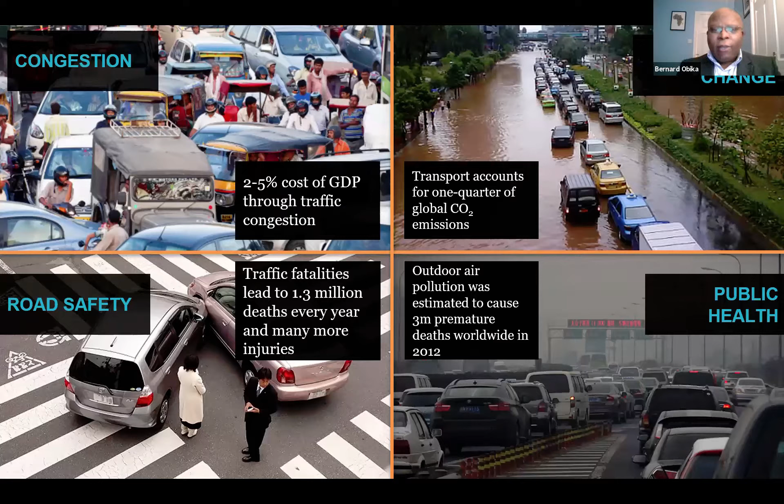And of course, the pollution we see is causing so much havoc to communities around the world. And so that is really what the HVT program is about.

How does that fit in the context of global development, sustainable development goals? I read from a statement in the SDGs that says sustainable transport systems, along with universal access to affordable, reliable, sustainable and modern energy services, quality and resilient infrastructure, and policies that increase productive capacities will build strong economic foundations for all countries. So transport is certainly a key part of the SDGs and cuts across a number of other SDG targets.

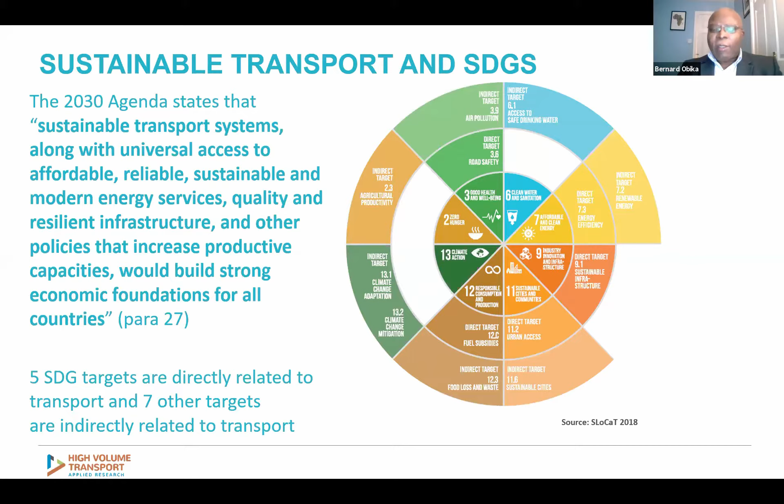So how does the high volume transport program work? The program is divided into 2 parts. In part 1, we subdivided our effort into 4 major themes. The first theme being long distance strategic road and rail transport.

Urban transport has been the second theme. Low carbon transport, the third theme. And the fourth theme included such issues as gender, vulnerable groups, and inclusion. Within that last group, we also included road safety.

So we engaged with a number of fairly major research organizations to carry out a state of knowledge review, to understand where we are, what are the real current issues affecting us, and what are the barriers in low-income countries. This resulted in a fairly extensive, what I still think is probably arguably the most comprehensive treatise, up-to-date treatise on what we know about transport in low-income countries.

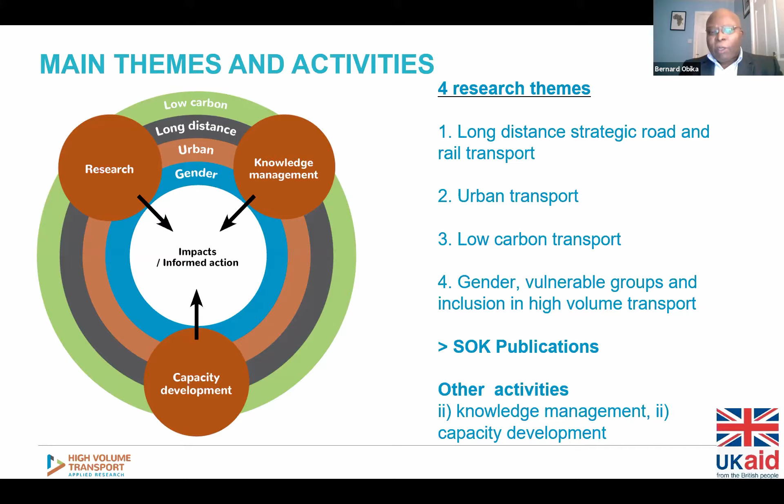These were published in the Sustainability Journal, and there is a book based on those publications that will shortly be published. In parallel with carrying out those state of knowledge reviews, we also undertook extensive knowledge management and capacity building work.

So as we move into part 2 of the high volume transport program, the SOK studies allowed us to identify the priority areas to focus our research efforts in. We narrowed this into 6 key priorities.

That is policy and regulation, including engineering. For example, the topic CRISPS falls under this particular category, the topic we're about to talk about. Climate change mitigation and adaptation is a key focus for us. Inclusion, gender and road safety remain a priority area.

Technology and innovation, including, for example, decision support systems such as HDM4, which many of you will be familiar with, remained a priority for us. And of course, we have to address fragile and conflict affected states, and underpinning all of these issues is the issue of research uptake and capacity building, without which we will not see the impact of much of the work that we do.

So, one minute, Bernard. Thank you.

As we go through, just to highlight some of the activities that HVT is undertaking at the moment: we have 13 major research projects ongoing in various aspects of the priority areas I've mentioned. We have also responded to the COVID-19 pandemic with up to 21 response and recovery initiatives. And of course, we continue to work on various aspects of seeing the impact of what we do on the ground.

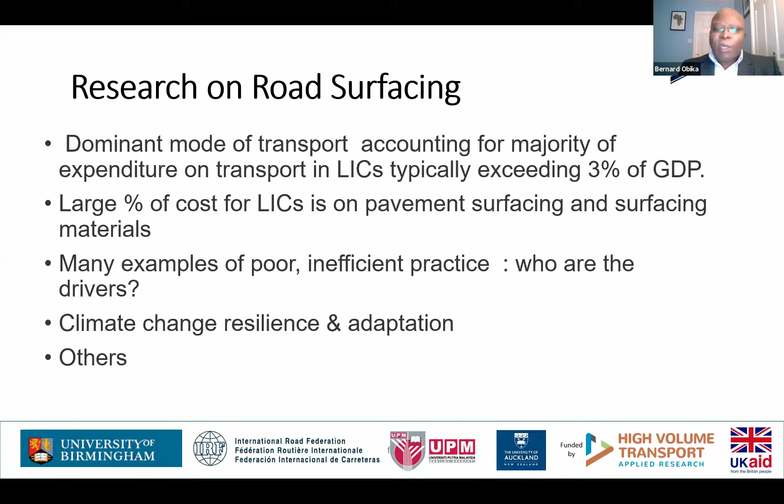So we support policymakers, central governments, the private sector, practitioners, and civil society in making impact and changing transport systems. That is what HVT is there for.

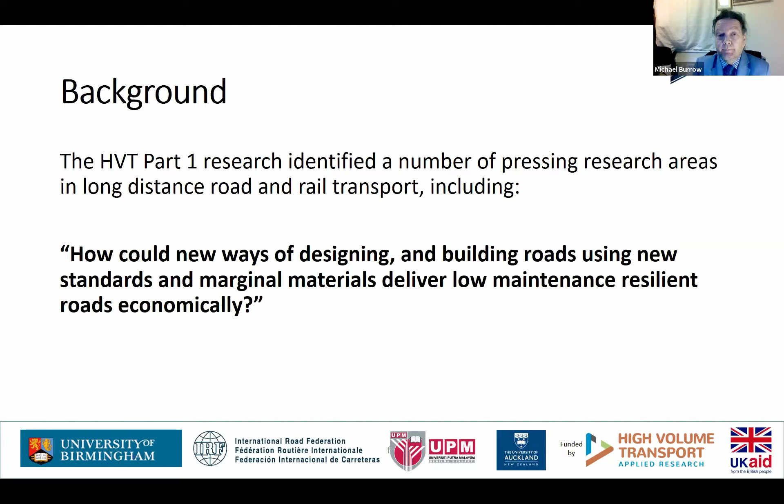Before I go on and give an overview of the project, let me introduce you to the project partners. We have ourselves at the University of Birmingham, and at Birmingham we have 3 institutions and schools involved in the research: ourselves, Dr. Gatura and myself at the School of Civil Engineering, the International Development Department, and the Department of Physics and Astronomy.

Project partner from Auckland, New Zealand, Dr. Theuns Henning, will introduce himself in a moment. He leads the research in the Transportation Research Centre at the University of Auckland. And in Malaysia, we have Professor Ratnasamy Muniandy, who leads the Highway and Transportation Engineering Research Centre at UPM.

And then, of course, as you've been introduced to, we have Mrs. Susanna Zammataro, who's the DG, the Director General of the International Road Federation.

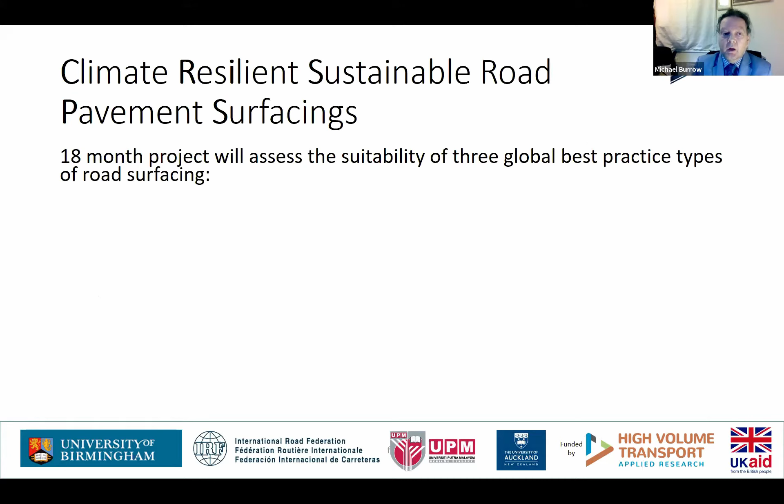So a very brief overview about the CRISPS project. It's an 18-month project, and we're assessing the suitability during the project of 3 global best practice types of road surfacing. These road surfacing types are the result of many years of research in New Zealand and Malaysia. Dr. Henning and Professor Ratna will describe those to you shortly.

These pavement surfacings have been utilized and developed in Malaysia and in Auckland, and the goal of this program is to assess their suitability within this project in the low-income country context. Primarily, we're looking at two things: the resilience of the roads to climate change, and their ability to save road user costs over the life cycle.

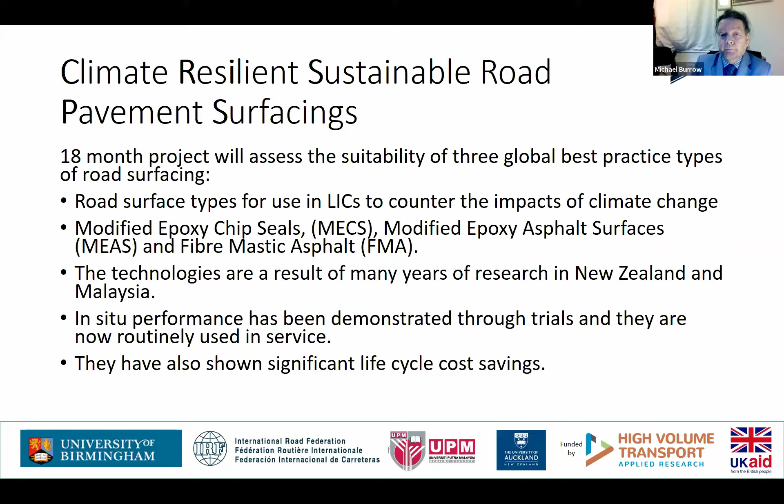What's the research methodology? Just a little detail: we have 4 work packages. The first is underway, undertaken in New Zealand and Malaysia, collecting data on the existing performance of roads using those 3 surfacing materials. The idea then is to extrapolate the performance of those roads to the conditions we might consider in low-income countries, so there's a lot of mathematical modeling that will take place there.

The second work package is the life cycle analysis module, where we consider the deterioration models developed in work package 1 and analyze those from an economic point of view over the life cycle and in the conditions we expect to see in low-income countries—conditions in terms of traffic, maintenance, and environmental issues.

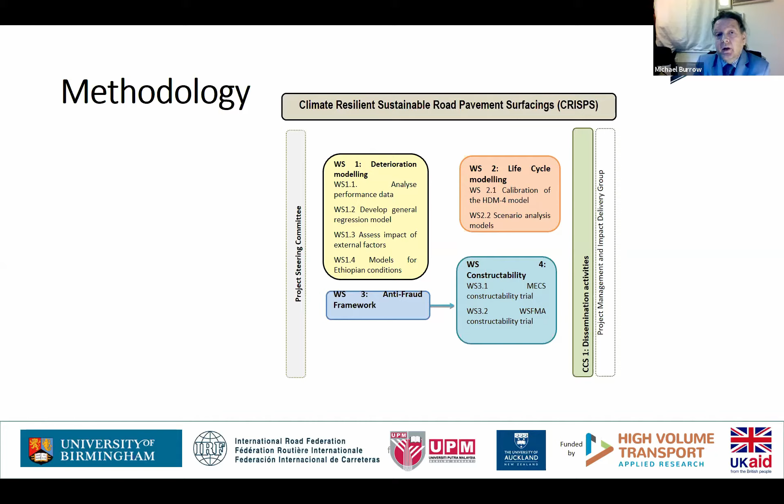A very important aspect of our program is that we have a project steering committee, an independent committee overseeing the research, led by Dr. David Alabaster from NZTA, the New Zealand Transport Agency. We also have a very important component, which you'll hear about last today: the dissemination strategy, because without good research, if we don't disseminate it, then it remains simply research.

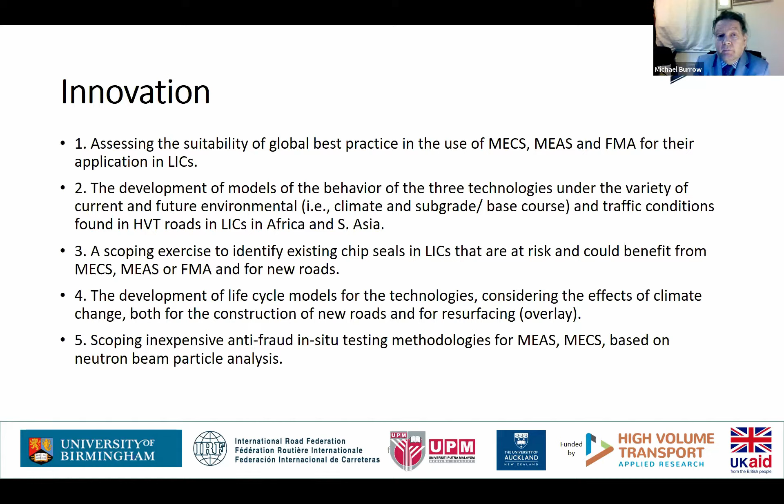There are some key points about the innovation we'll be undertaking within the project. What hasn't been done before worldwide? Well, we haven't assessed the suitability of best practice in the use of these three pavement surfacing materials, particularly for their application in low-income countries.

We'll be developing novel models of the behavior of the three technologies under a variety of conditions, both currently occurring in low-income countries, but also those we expect in the future as a result of climate change, and changes in government policy, funding, and so on.

Work like this is crucial in terms of determining the development of life cycle models for the technologies. And again, that's something that hasn't been undertaken before.

If you can imagine the data we collect from specific areas in New Zealand and Malaysia, how can we extrapolate that to the economic, environmental, and socio-political conditions we'll find in developing countries? One or two of those conditions might be similar, but there'll be a whole range which are not similar. So part of the crux of the project is modeling and understanding how the material behaves under those conditions now and into the future.

And then, as I mentioned, we'll also be developing an anti-fraud mechanism through work with nuclear physics, to see how we can specify a cheap, low-cost solution for doing something similar in the field.

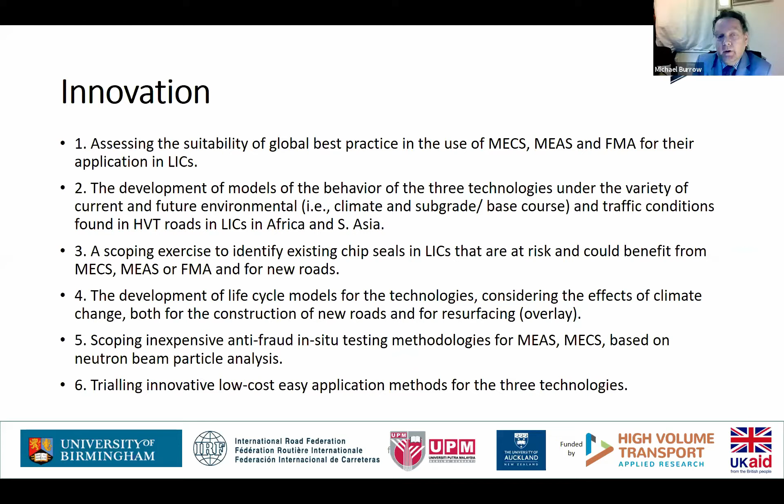There'll be a series of field trials, which Dr. Gatura will explain shortly. Thank you.

Thank you very much. I want to acknowledge my colleagues here from New Zealand. It's already been mentioned that David Alabaster from our New Zealand Transport Agency has led much of the work I'll be talking about in the development of the epoxy asphalt technology and epoxy chip seals in New Zealand. Also my colleague from the University of Auckland, Associate Professor Joseph Costello, who was one of the students from Birmingham, and in a roundabout way was the catalyst for the relationship between us and Birmingham. The University of Auckland is central to the city of Auckland itself.

For those who don't know where Auckland, New Zealand is, it's about eight movies' flight distance from the UK, depending on the route you take. We've got about 30,000 students. The Faculty of Engineering is the largest faculty in the university, and the Civil and Environmental department is the largest within our faculty. We draw about 200 to 230 students into our Year 2 program. We're very proud that this year we were announced as number 39 in the world rankings of civil engineering departments.

So the research questions - the first one, as Michael has mentioned, has been addressed in the first stage of this project: understanding the life cycle impacts of climate change on the roads. What we need to look at now is to understand the expected performance of our alternative technology, the epoxy chip seals. Then, once we know that, we need a life cycle analysis approach to prove when these alternative materials will be a better life cycle option for our roads.

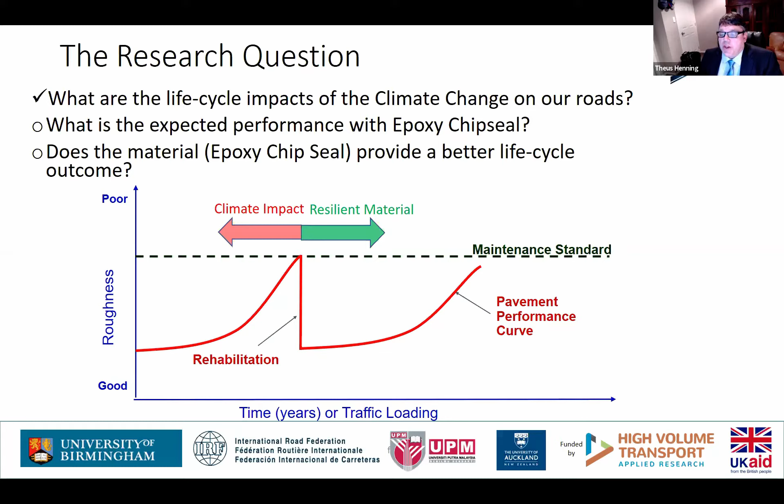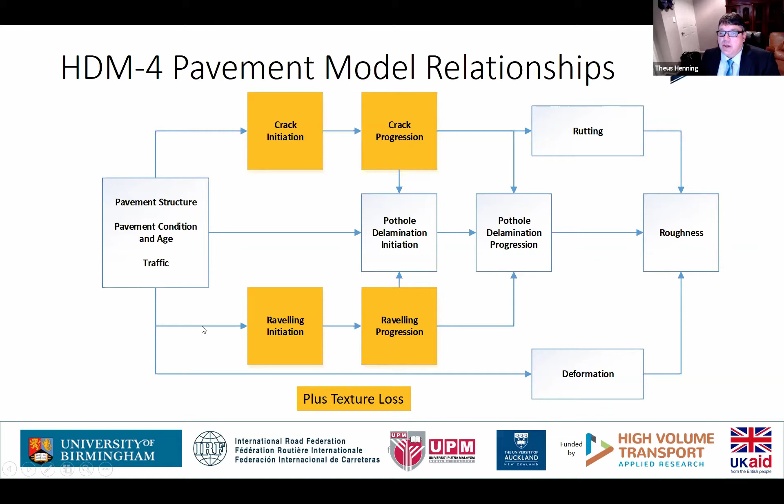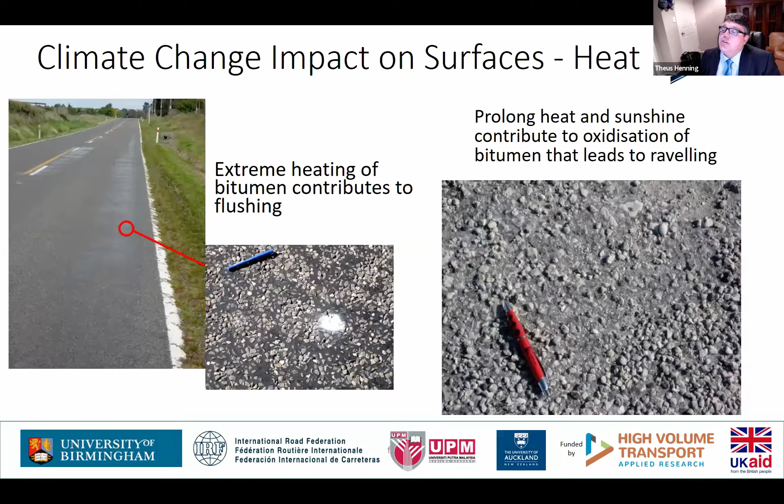When we look at the different impacts from climate change on our road surfaces: if there's a good amount of bitumen on your road, it should last long, but unfortunately during extreme heat conditions you can expect some flushing to happen, where the bitumen rises to the top of the surface and you lose friction. The alternative is if you don't have much bitumen within your surface, and through prolonged heat and sunshine you start losing the stickiness of the bitumen through oxidization, and you start losing the chips as raveling occurs.

On the other side of climate change impacts, when things get a little wet, the predominant defect we see is pavements getting weaker. Increased moisture conditions lead to a reduced pavement bearing capacity, and as a result we start seeing cracks occur on the surface. Once cracking is there, more moisture gets into our pavements, which then accelerates the deterioration of our pavements.

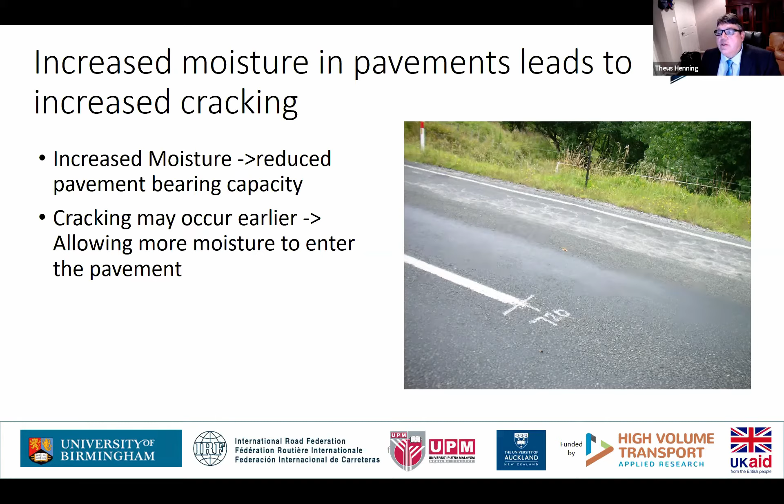So what we've shown here is a typical crack progression deterioration on our road surface. There are two stages we're interested in: the first is cracking initiation, which predicts mathematically when exactly cracks are going to start appearing, and after that the crack grows at a certain rate. Through a calibration process, we look at the prevailing conditions, how the pavement is built and the traffic it carries, and for that specific condition we calibrate the model so it reflects reality on that specific road link.

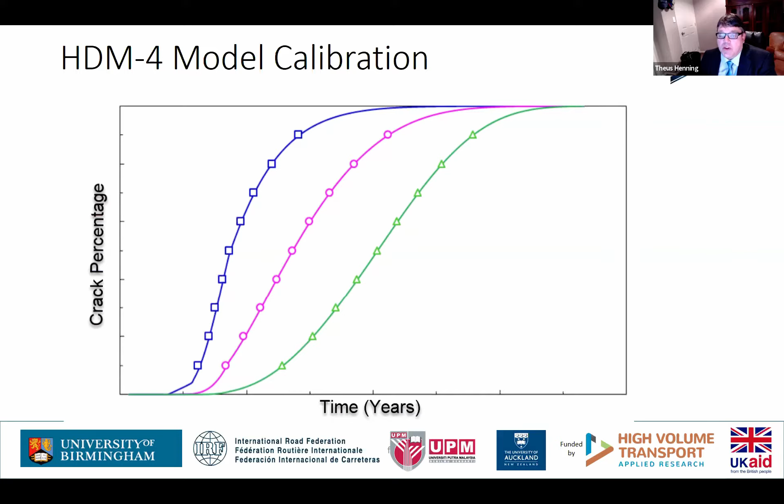We don't have that much data to work with because the technology we're talking about, both porous epoxy asphalts and epoxy chip seals, are relatively new. So a lot of our data and assumptions come from laboratory testing undertaken in both Malaysia and New Zealand. We do have a few trial sites out that will certainly inform us with more data.

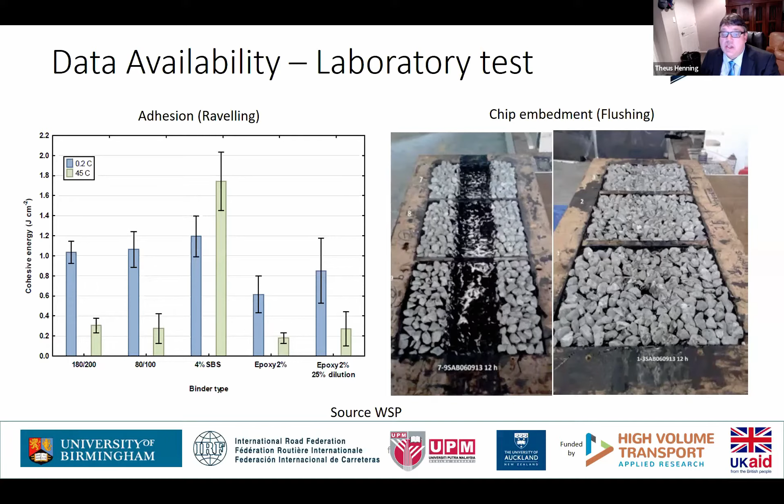On the left, I've got some laboratory results on the adhesion properties of various different surfacing and bitumen types, and we can see that we get quite an advanced cohesive energy out of our epoxy mixes. On the right-hand side, we look at chip embedment or flushing that occurs under heat conditions, and again with the epoxy surface you get a very stable, stiff surface that does not have the wheel track rutting you see on the left-hand side.

We've also done some early investigation at a network level using a system largely based on the HDM4 approach, which is what we use here in New Zealand. We've taken a sample of the network and looked at the failure probability of chip seals - that's the blue line - and also of chip seals under high stress conditions. On the vertical axis is the survival rate, the probability of failure against the life you're going to get out of it. Typically, if you look at the 50th percentile, you know roughly how long those surfaces can last.

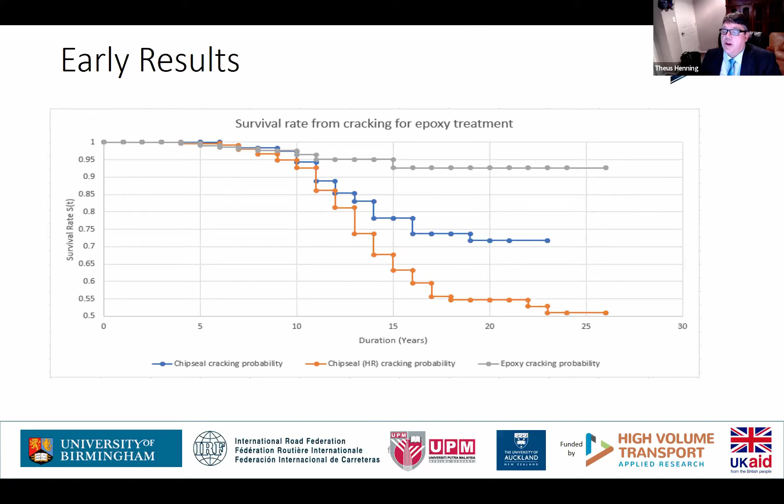What you can see out of our epoxy surface is that the cracking probability is quite a bit lower compared to some of the other surfaces, so we do expect quite an extended life out of our epoxy surfaces. So that's what I have for this moment. Certainly for the study area, we want to provide all-weather resistant surfaces for all our road users, whatever that may be. Thank you very much.

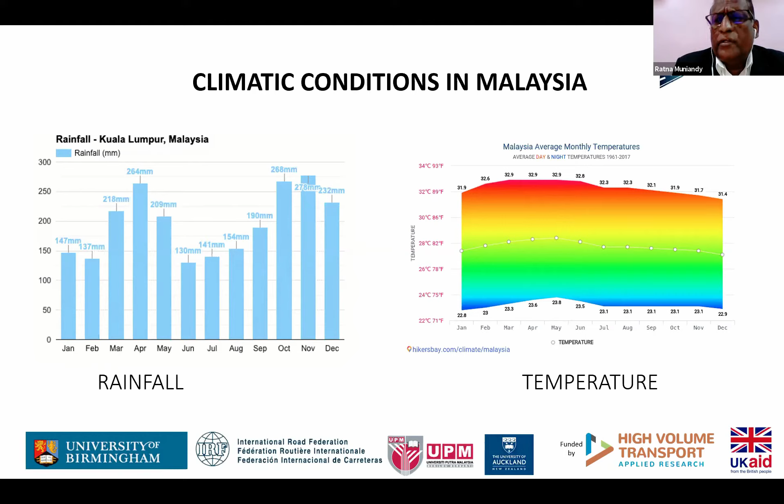Just to remind you, this is just an average value. There are situations where the temperature has gone up to 36 and 37 before, but we're looking at very rational figures here. So again, this puts Malaysia in a very, very bad, highly climatic problem situation.

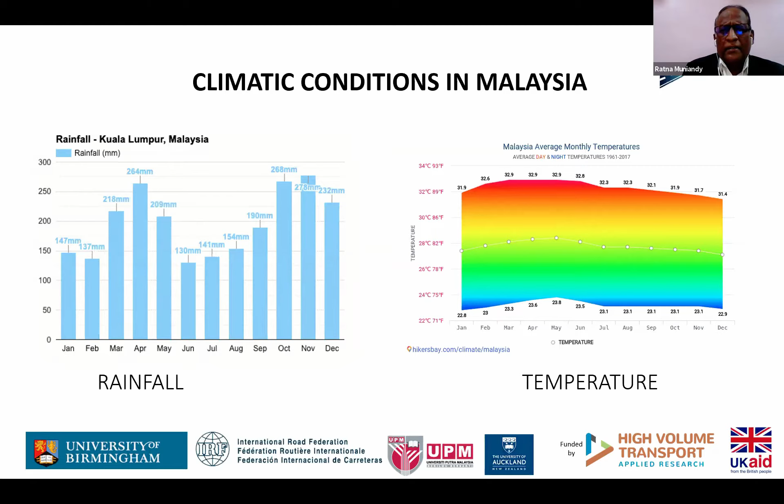Another background on traffic conditions in Malaysia: we have almost 31.2 million registered vehicles as of 2019, made up of passenger cars and commercial vehicles as always. The total road network, federal and state roads, amounts to almost 250,000 kilometers.

And the expressways, we have about 2,000 kilometers. But it is pretty much a challenge for the authorities and researchers to keep up with such a huge network for a small country like Malaysia, right?

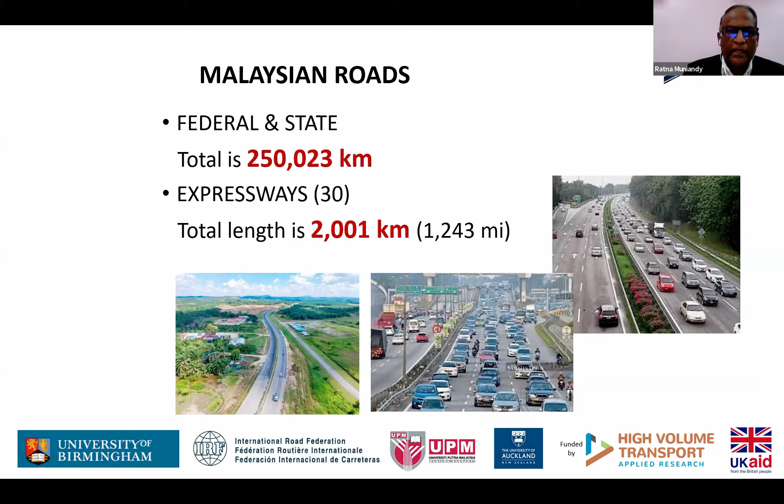Talking about moisture, with the torrential rain in Malaysia, we have problems like water table fluctuations that encroach into lower layers of the pavement, even into the asphalt layers. That is actually a problem, not forgetting the moisture infiltration from rainfall through cracks in the pavement.

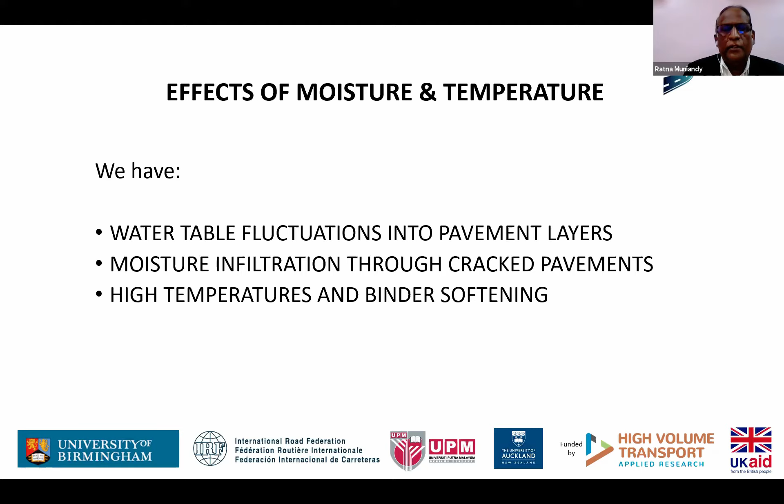And again, I mentioned the temperature. We do have high temperatures, and that may soften the binder. So overall, the climatic situation is posing a major problem for asphalt pavements in general.

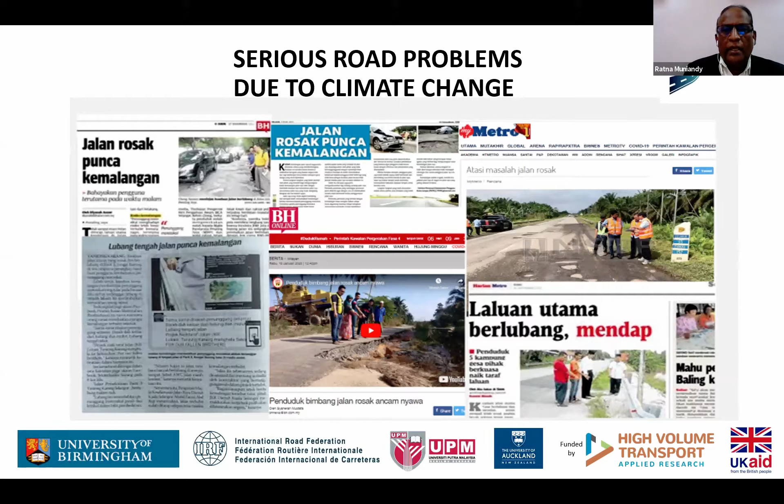These are some of the issues splashed across the media in Malaysia. I'm sorry, this is in our own Malay language. So it all amounts to problems: potholes, rutting, cracking, raveling, that the other speakers have been talking about.

Malaysia is no exception, but I'm quite happy that Malaysia has come a long way in improving all the roads that we have. This was taken some time back, so I think this problem is pretty much reduced. I'm not saying it is solved, but it is reduced.

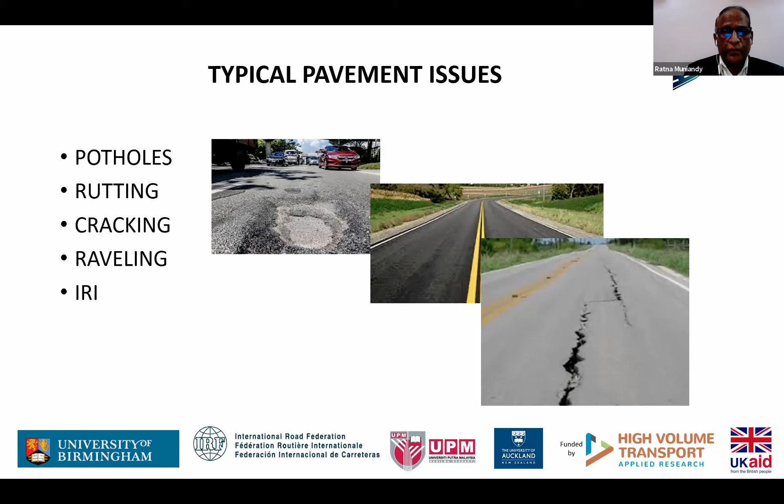Now, what about this Fibre Mastic Asphalt? We have tried so many different materials as modifiers in asphalt binders, but this is a novel process to use cellulose oil palm fibers from the empty fruit bunch. Once the fruit is taken out, we have the empty fruit bunch that goes through steam explosion and is finally processed into cellulose fiber of certain sizes.

Not all fibers will work. You may ask me whether fibers from the tree trunk and the leaves work. They won't, and we have already tested that. So it is specifically from the empty fruit bunch.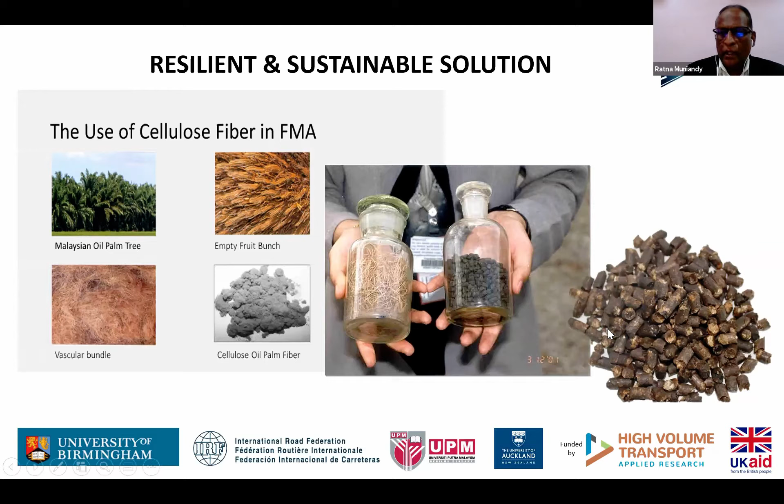Again, like I said, it comes down to all the processing, the size, and so on, to be converted into pellet form. You can see the pellets for easy introduction into the pug mill during the mixing. Now, how it works actually, right?

Based on all the work done in Malaysia, and the trial lays and projects undertaken there on fiber mastic asphalt, we find that the binder is retained for over a long period of time. This is the key factor in the use of this biomass waste in asphalt mixes.

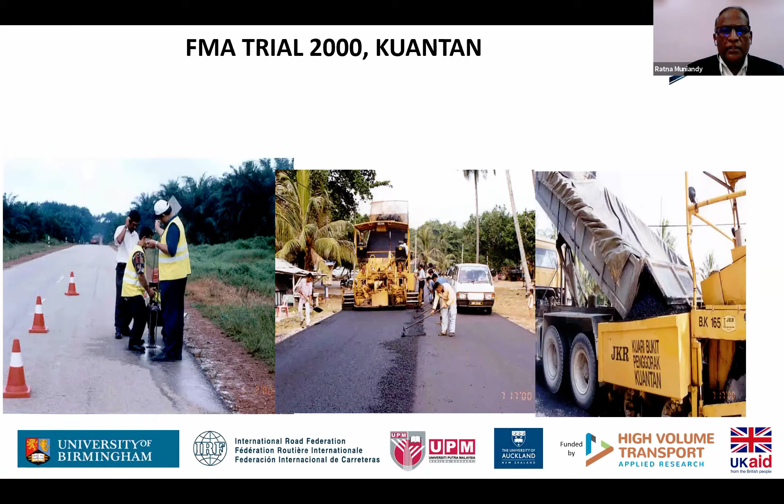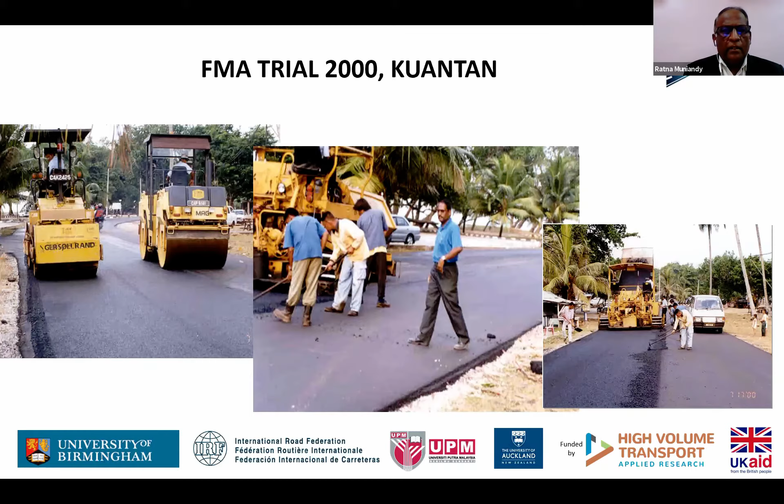These are some promotional videos dealing with fiber mastic asphalt in Malaysia, showing some of the work done since the first trial in 2000, which was done with the help of the Public Works Department somewhere on the east coast of Peninsula Malaysia. Since then we still have a lot of data from these segments. Some work was also done in Putrajaya around 2000, and these are more recent works.

In 2018, they had a trial on the Senai Desaru Expressway. This stretch was quite bad, and after trying various technologies, finally the fiber mastic asphalt was used on that stretch for some length, and it is still performing very well.

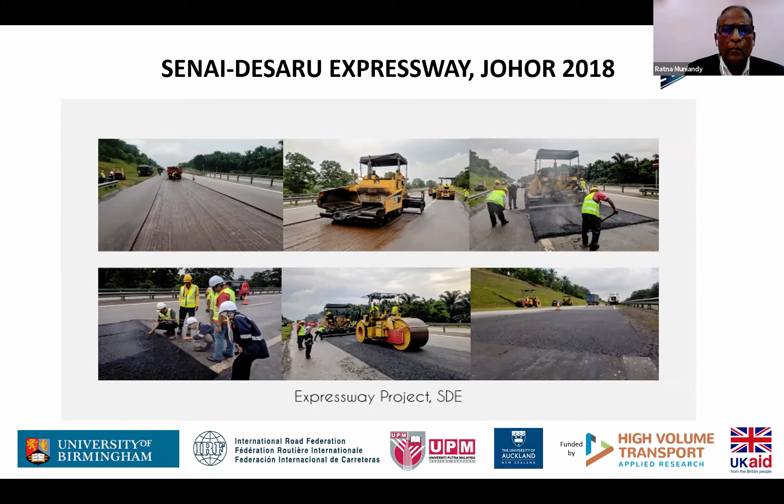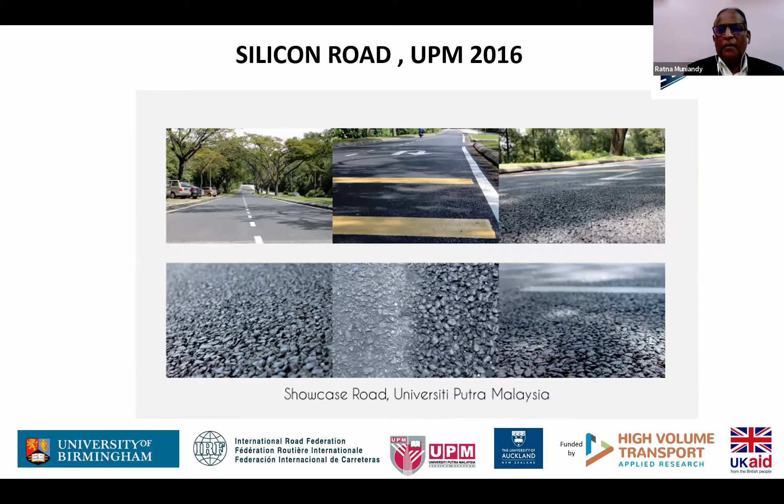These are some other road stretches carried out back in 2016, so it's already almost 4 or 5 years now. If we look into the micro texture of the pavement itself, we find that the binder is still retained. That is the magic thing about this fiber, retaining the binder for a long period of time.

This is another 2 projects carried out in Malacca. This is not a heavily loaded road, but a medium traffic road for the community there. 2 projects done in 2016 and still doing very well, and again I'd like to highlight that binder retention is excellent.

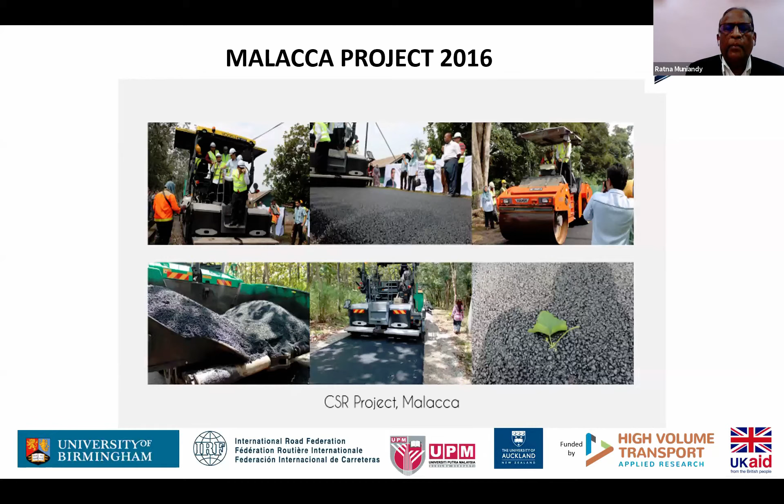Now with all of this, we would like to carry out a life cycle analysis on the data available to us, and of course we will continue to acquire more data. Basically, we will look into the traffic progression since the FMA was introduced on certain segments, then look into the performance data of FMA, and at the same time we do have falling weight deflectometer data on pavements with the technology, which should give us the status of the lower layers.

In terms of the structural number, the E values, and so on, with all of this data we should be able to run initial and remaining life assessment of fiber mastic asphalt based on some transfer functions. If HDM is available, we'll use the HDM4 model. Otherwise, we will develop our own regression model, which shouldn't be a problem.

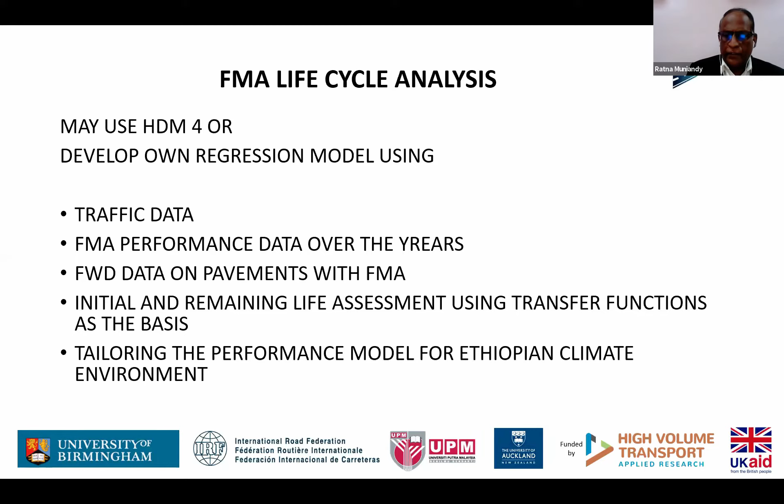The next challenge will be to tailor the fiber mastic asphalt used in Malaysia to Ethiopia, with its different climatic conditions. After looking at the Ethiopian climatic situation, in the Kola and Berha regions around the central part, the temperature profile is quite similar to Malaysia, so I don't see much difference there, except that the rainfall range is much lower compared to Malaysia.

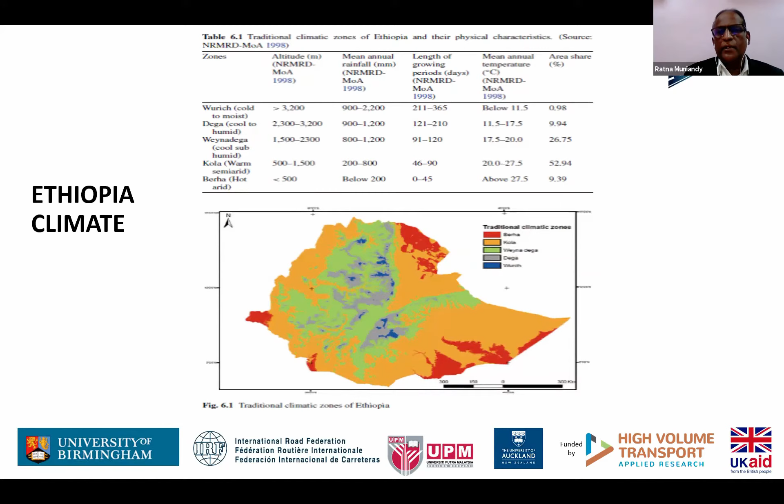So I'm not sure, I haven't looked at the data from there yet, so it's very difficult to say how much moisture damage has taken place there. But as far as temperature is concerned, yes, it is quite similar to Malaysia. Okay, these are some of the trials still ongoing with the airport and more expressways.

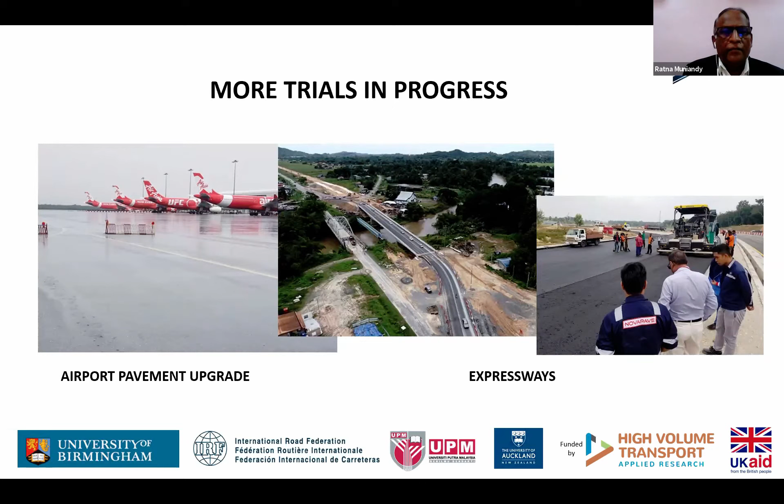I think I'm still within the 5 or 6 minutes, and already, so I would be grateful if you can wrap it up.

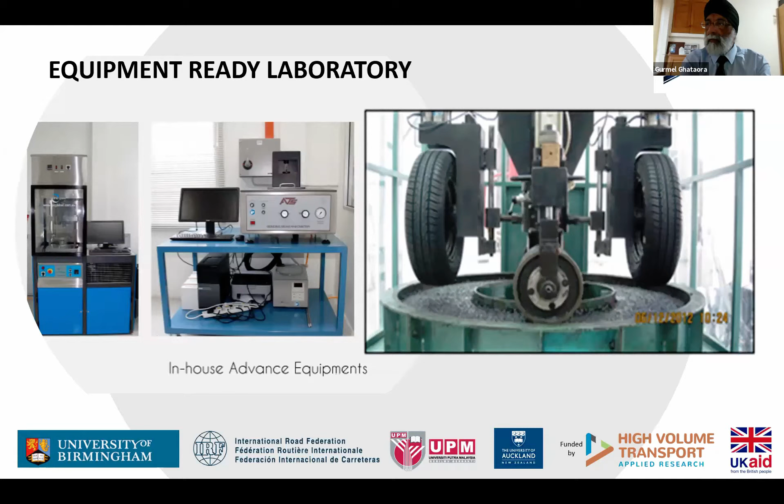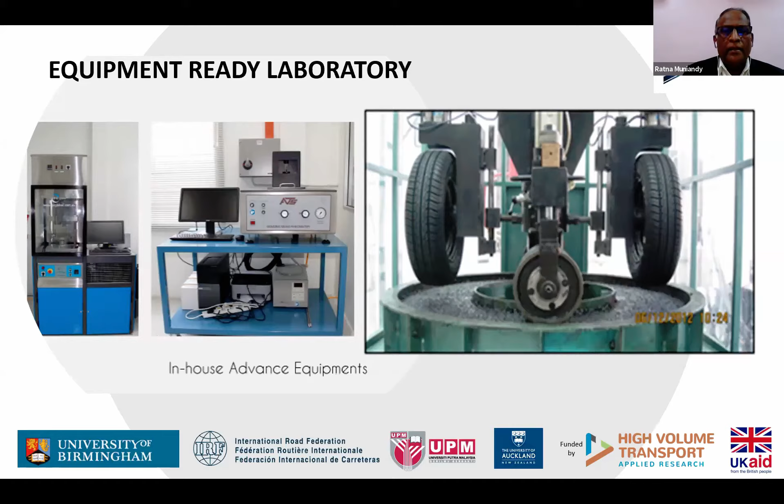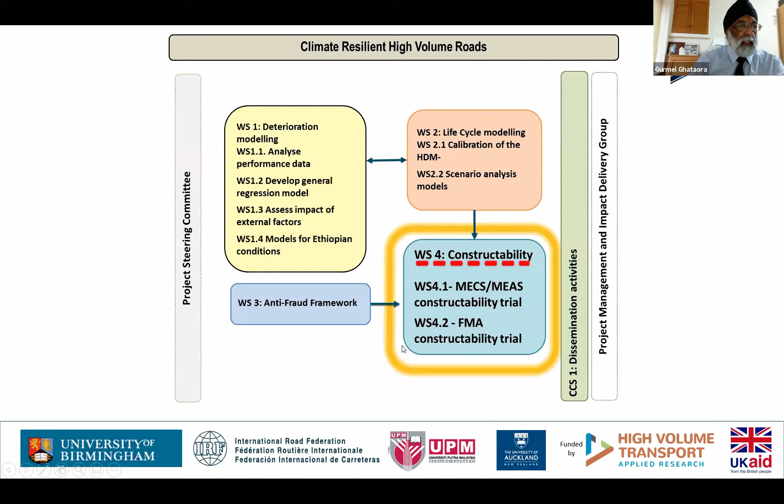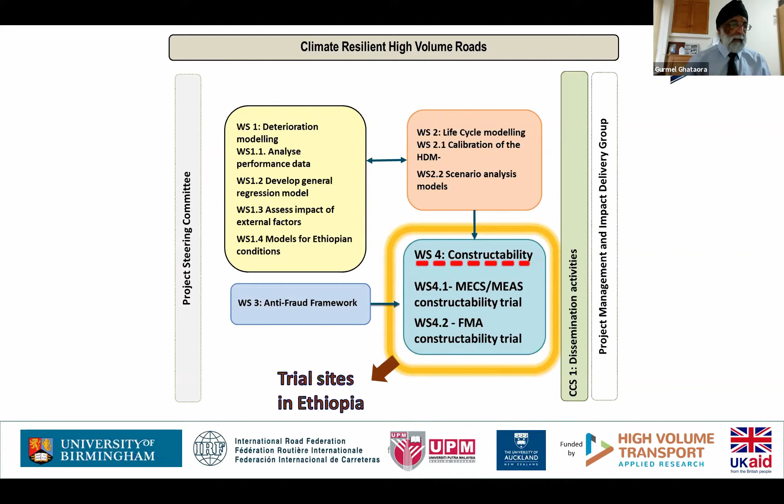So this is the outline scheme for the project, which Dr. Burrow spoke about, and I'm going to concentrate on work stream 4. These trials will be carried out in Ethiopia. We have good links with the Ethiopian Road Authority, and we have a number of PhD students working in the country, and we're going to use the PhD students to support part of this project.

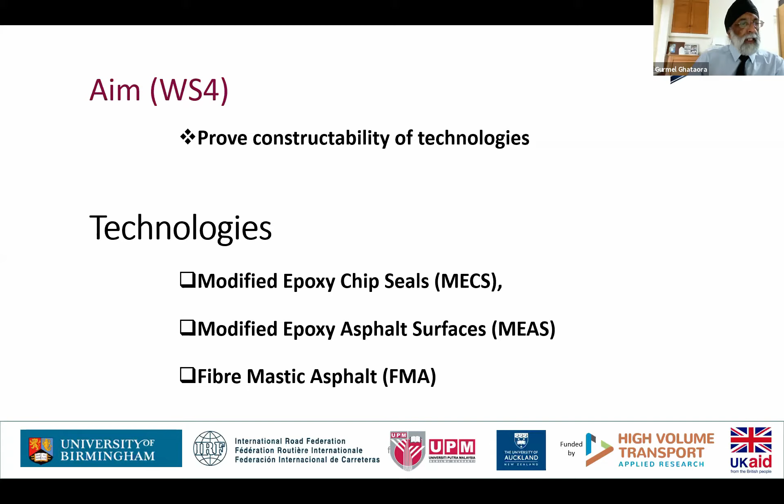So the aim of this work stream is to prove constructability of technologies. As you've heard, these technologies have been trialed in New Zealand and in Malaysia, and we now need to see if they work elsewhere. The 3 technologies are modified epoxy chip seals, modified epoxy asphalt surfaces, and fibre mastic asphalt.

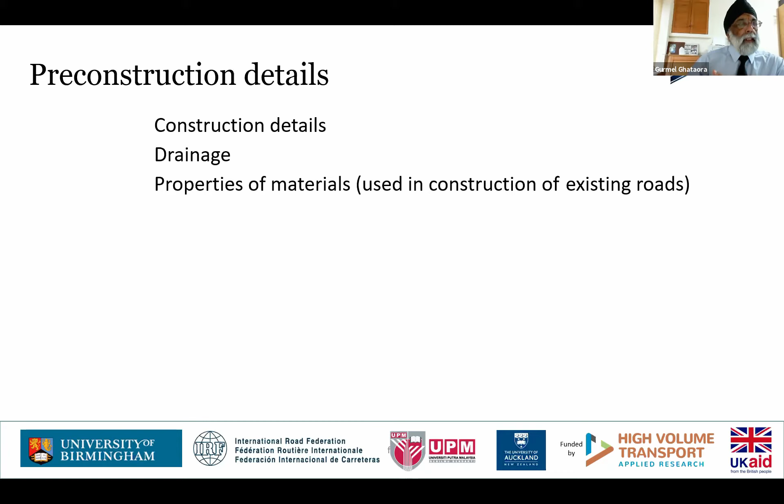Okay, so before we go into selecting the sites, we need to look at construction details, drainage conditions, properties of materials being used in existing roads, performance of existing surfaces, climatic conditions like rainfall, temperature, groundwater variations - all these things that affect the behavior of the road. And clearly we want to know about the loading conditions and how the roads have failed if they have failed. So all this information we need from existing trials, what people have done, what sort of things have been discovered, the type of soils they've constructed the roads in, the type of materials they have used.

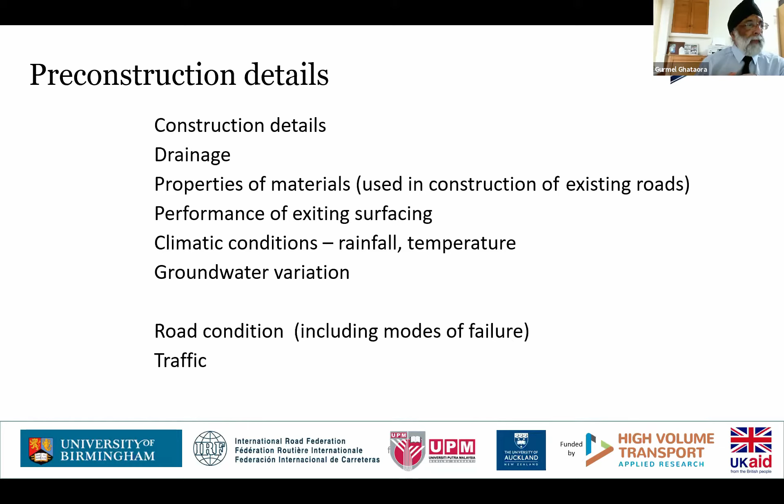And we will then identify some sites in Ethiopia.

Okay, what we also want to do is monitor local rainfall and temperature and drainage conditions. This is very important because what we come out at the end has to be very rigorous. We don't want to just build a trial and say, okay, it's buildable. This is going to be part of ongoing research in Ethiopia, and it's going to be part of PhDs - not 1, 2 PhDs - and we need to show everything is rigorous and we fully understand the reasons why things have worked or not worked, and try to put an envelope on conditions under which these technologies work.

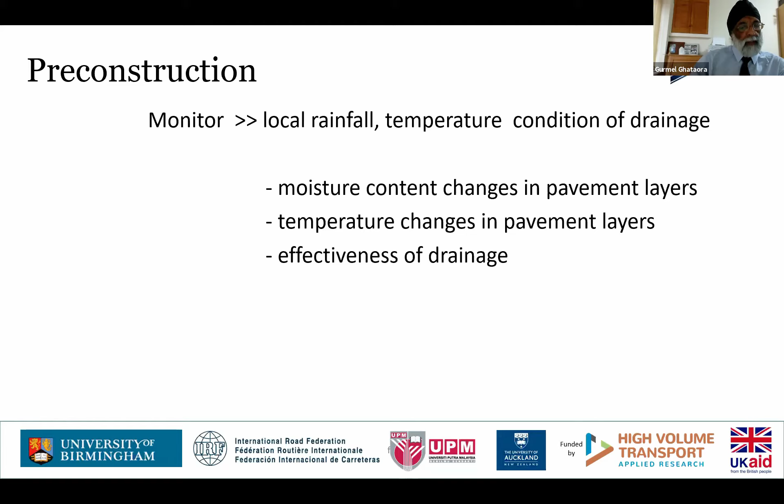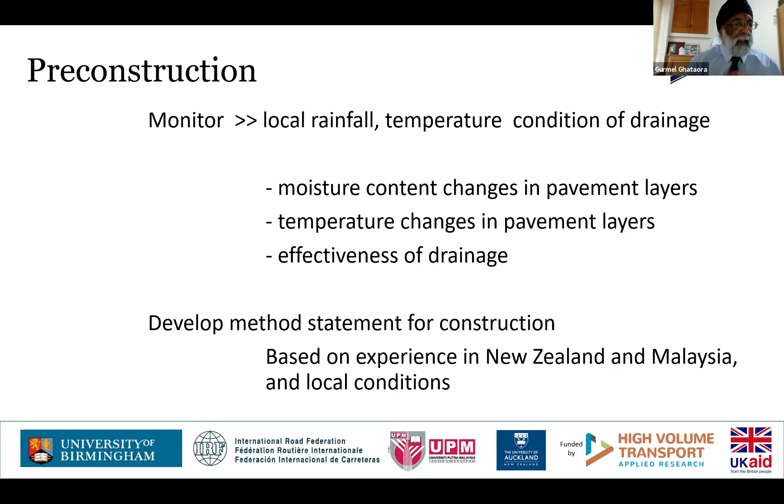So we intend to develop or use some techniques for measuring moisture changes within pavement layers, temperature changes within pavement layers, and assess effectiveness of drainage. We have done this sort of work in Ghana already through another research project, so it's just transferring know-how from one place to another. And of course, our colleagues in New Zealand and Malaysia have also been doing some work, so the idea is to pull all this together. What our colleagues have done is very important, because we want to map what they've done onto local conditions in Ethiopia, and then we go ahead and select our sites.

So in terms of construction, the aim is to monitor ease and effectiveness of the technologies, but as I have mentioned, we intend to go beyond just construction.

Okay, so after construction, we will carry on monitoring the rainfall, moisture content changes within the layers, temperature changes within the layers, and carry on monitoring the effectiveness of drainage. Drainage is very important, water is very important, temperatures are very important, and my colleagues in earlier presentations have mentioned all these things. Okay, we will also carry on monitoring traffic and road conditions.

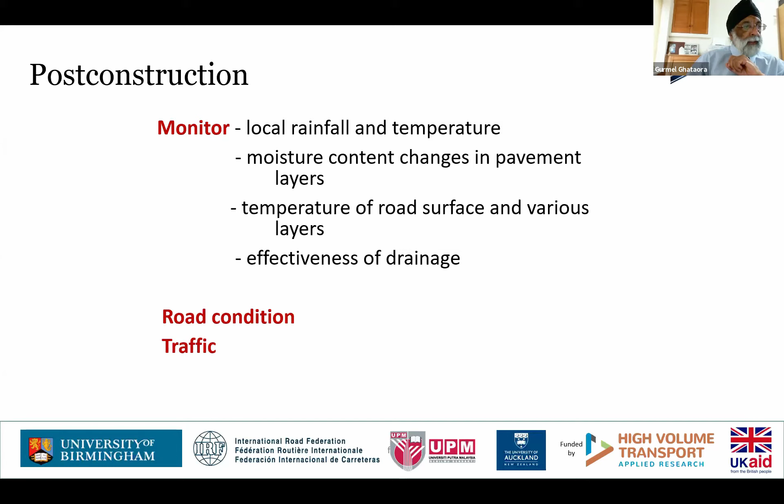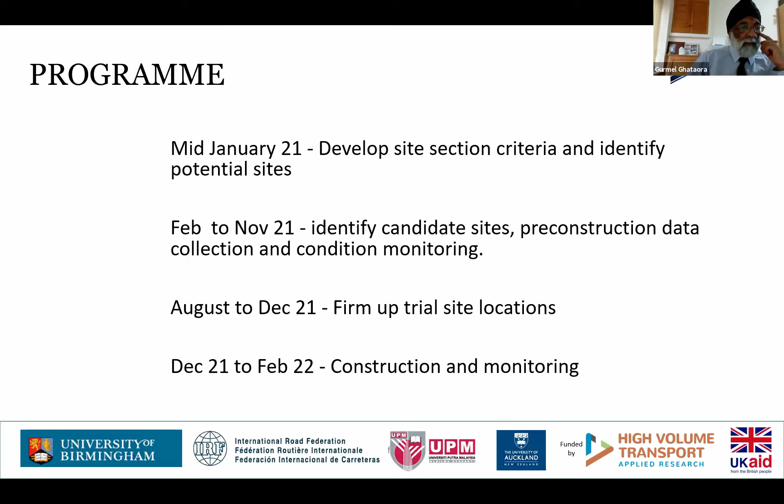The program is that by about mid-January, we'll have developed site selection criteria and identified potential sites. We will then do some feet-on-the-ground work and identify more details about the sites, home in on candidate sites, start collecting pre-construction data, do some condition monitoring, and firm up our trial sites with a view to constructing the trials between December this year and February next year, then launch into post-construction monitoring.

Okay, I will stop there. Thank you.